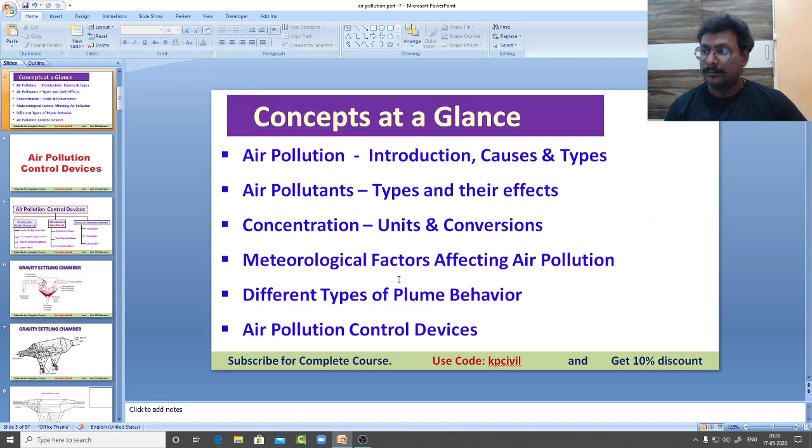Since the last 6 days we are in continuous live sessions on YouTube. This is the last part of air pollution we are going to discuss. I hope you enjoyed all the 6 parts we have discussed previously. From Monday to Saturday, 6 parts of air pollution we have come across. Now, we are going to have the last session of air pollution.

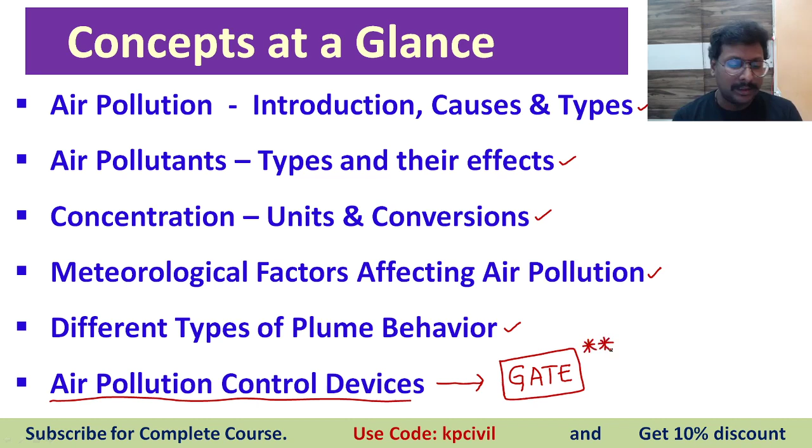Now, air pollution control devices. This is the basic classification. There are 3 categories. First one, solid particle removal. The solid particles available in the air we call TSP, total suspended particulate matter, or SPM, suspended particulate matter. For suspended particulate matter removal, we have gravity settling chamber, centrifugal settling chamber, electrostatic precipitator, and finally fabric filters.

And for the same, we have wet devices, scrubbers, separation of solid particles using some moisture content, water content or liquid chemicals. Devices for the same solid particulate matter in presence of water or liquid chemical we call scrubbers. Scrubbers are cyclonic scrubbers, tray type scrubbers, Venturi scrubbers.

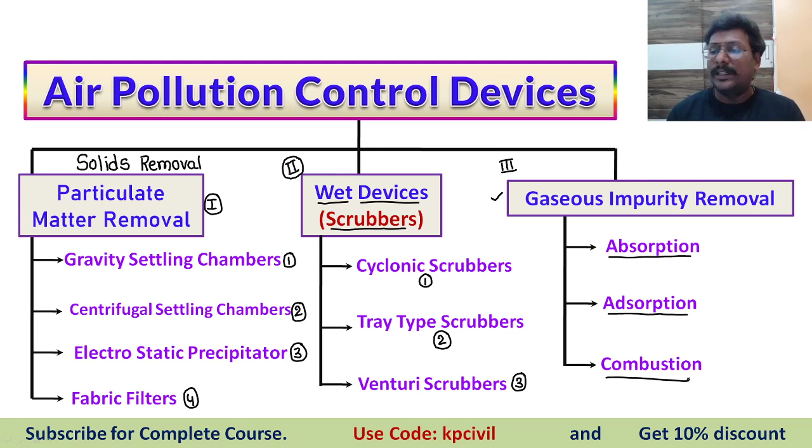Gaseous impurity removal: absorption, adsorption, combustion. Three phenomena. First, solid particulate matter removal in dry manner: gravity settling, centrifugal settling, electrostatic precipitation, fabric filter. The same solid particles in presence of liquid chemical or water: wet devices. Finally, gaseous impurity removal: absorption, adsorption and combustion. First one, the name itself provides the information. Gravity settling chamber means settling of particles.

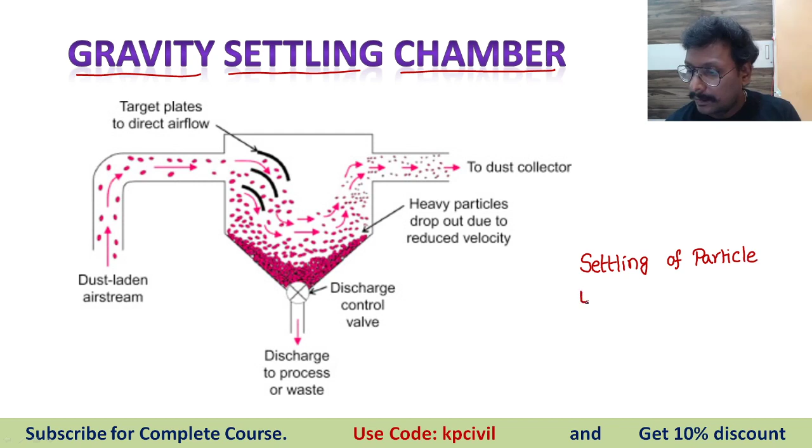Settling of particle under the influence of no artificial force, no physical mechanical force, only depending upon natural gravitational force. So if a particle is to be settled down under the influence of gravitational force, what are the parameters to be considered? Based on mass, self weight of the particle and its density, because the density of particle is greater than density of air.

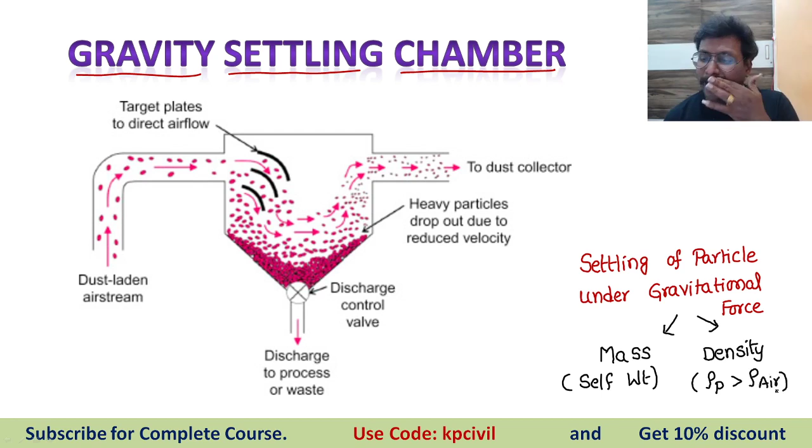So considering these two parameters, the particle whose mass is attracted by gravitational force and the particle whose density is greater than air density, that particle is going to settle down. So it is similar to what we discussed under sedimentation topic in water treatment, same manner. And this is designed to separate out particles with diameter greater than 50 microns.

Gravity settling chamber is provided to separate out particles with diameter greater than 50 microns, but efficiency is only just 50%. Why? Because settling is carried out only under the influence of gravity, particles' self weight and density, not modifying the particle, no additional other forces are provided, only the particle's original mass and density under the influence of gravity.

See here, this is a dust laden air stream, means impure air given into the chamber. Now that impure air is traveling inlet to outlet. During the journey from inlet to outlet, the particles having the mass have settled in a dust hopper. This dust hopper is going to collect the particles. Particles are settled based on their mass and density. Clearly written, heavy particles drop out due to reduced velocity, and heavy particles are given to the dust collector.

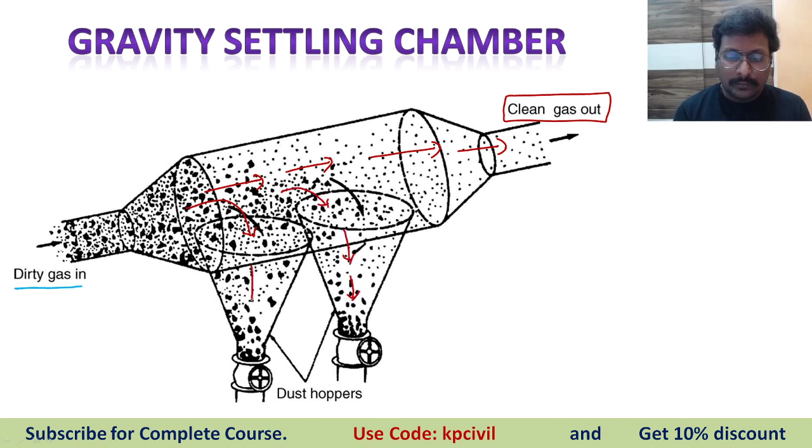This is one more figure. Dirty gas entered into it. Dust hoppers are collecting impurity. Impurities are collected while the air is traveling from inlet to outlet. Clean gas is going out. Impure particles are collected, falling down, and settled in the dust hopper. So this is a clear picture for you, that is easy for you to understand.

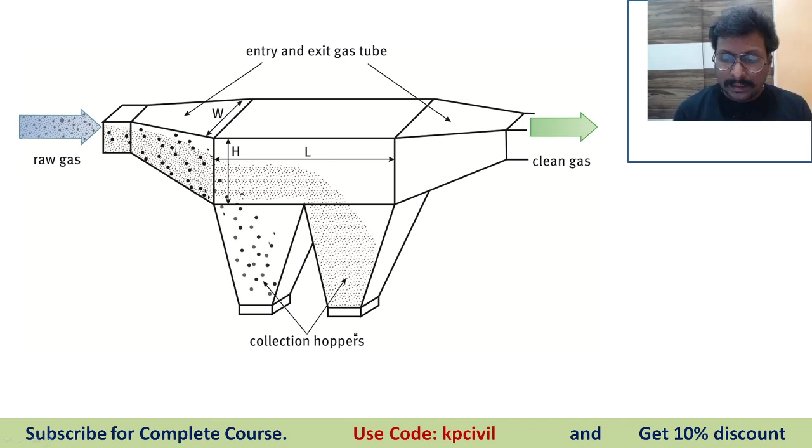There are two collection hoppers at the bottom. At the inlet, raw gas, polluted air. So these large diameter particles entered into the cross section of the chamber. Clean gas is traveling, going out, clean gas exits out.

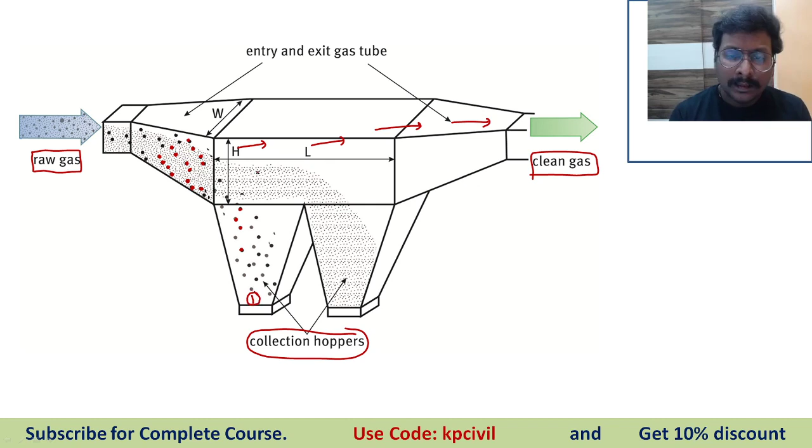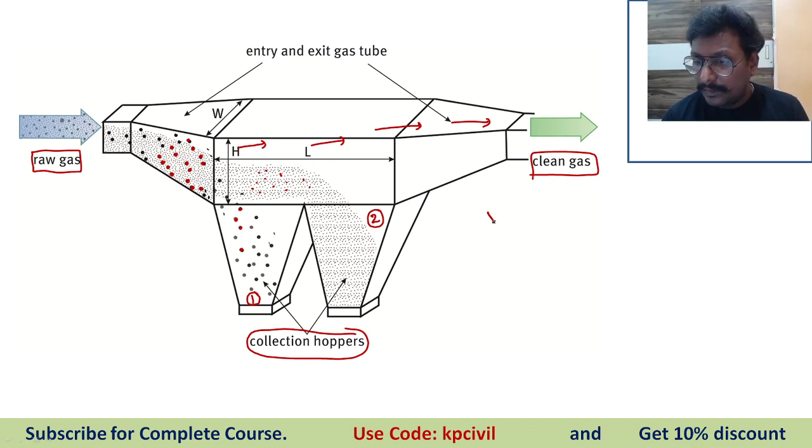During the journey, all the large diameter particles are in dust hopper 1; these are coarse particles, and the fine particles are collected in the second hopper. So in the initial hopper 1, the largest diameter particles are collected. While it is flowing slowly, the smallest particles are also falling down. Here we need to estimate Vs, settling velocity of the air particle. The air particle is going to settle down.

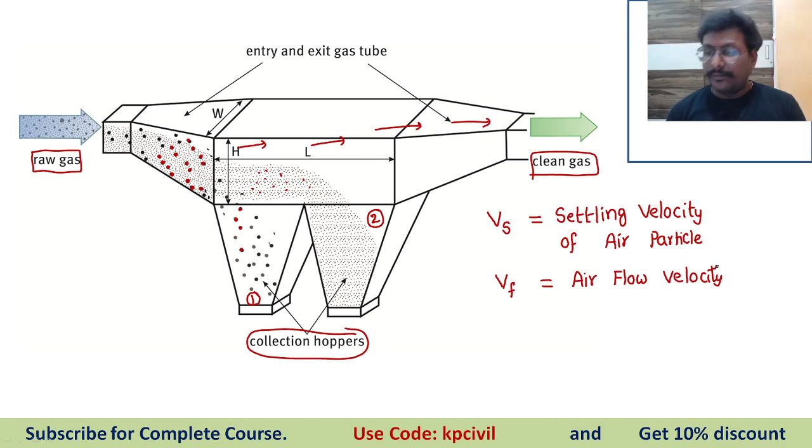And also we have Vf. Vf is air flow velocity. Vs is settling velocity of air particle. You can write down settling velocity. We have the settling velocity formula: g d square by 18 mu into rho p minus rho a, or we can express the same as g d square by 18 nu into S minus 1. Same like sedimentation process in water.

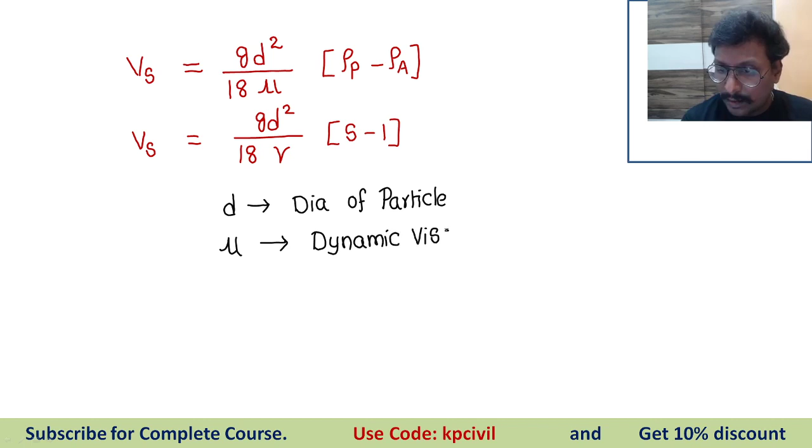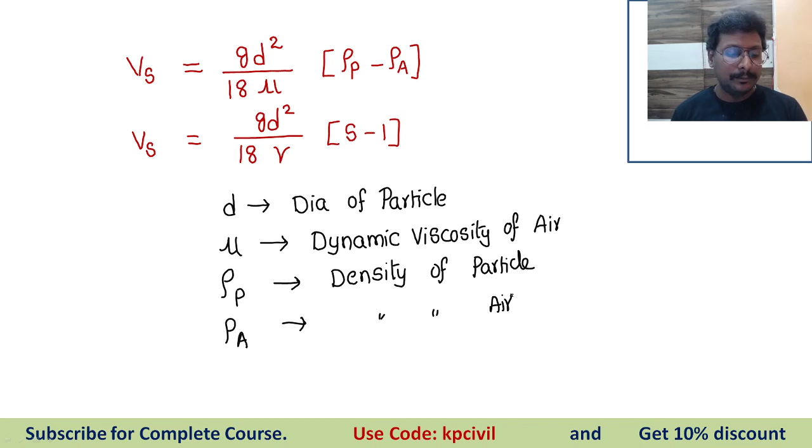d, diameter of particle, diameter of impure particle. Mu, dynamic viscosity of air. Rho p, what is rho p? Density of particle. Rho a, density of air. Density of particle and density of air. Got it?

We'll have a relation here: the time taken by particle to settle down. Distance traveled, depth of chamber, by velocity. What is the general formula for time? Distance by velocity of travel. The particle is traveling the vertical distance of the chamber depth with the settling velocity.

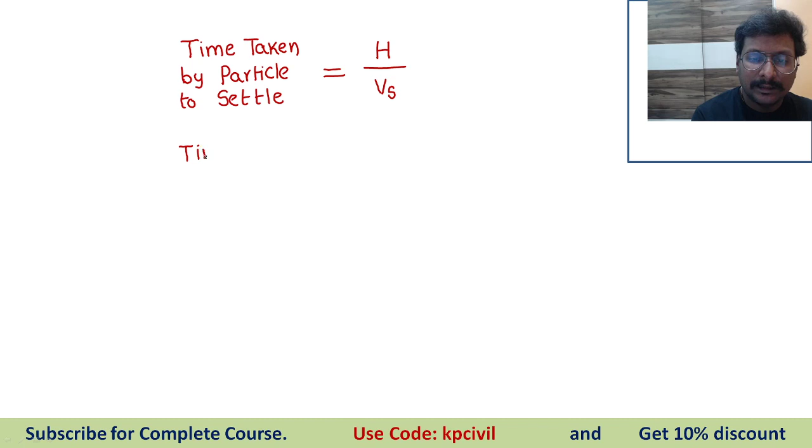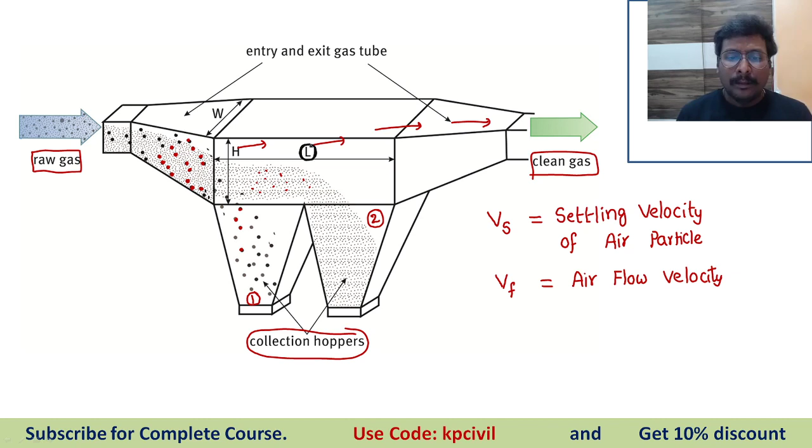Then time taken by air. From where to where is the air traveling? Air is traveling from inlet to outlet. The distance between inlet and outlet is the length of the chamber, and air is traveling with air flow velocity Vf. For particle distance travel, we will consider the depth of the chamber. So length is the distance travelled by air, travelling with velocity Vf.

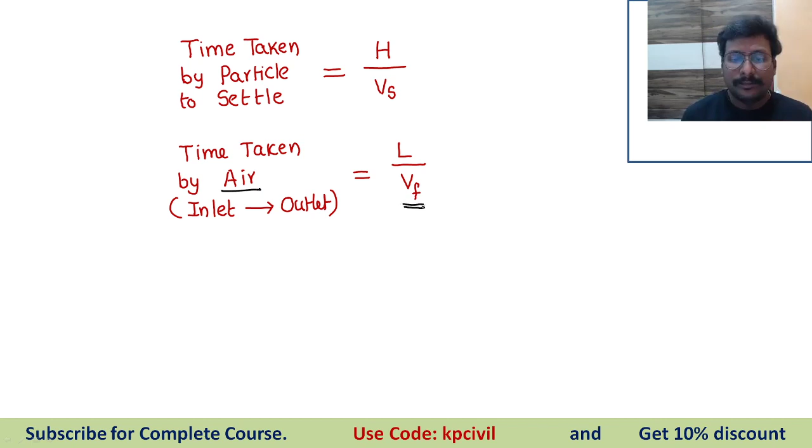The condition required for settling. What is required for settling? Both times must be same. That means H by Vs is equal to L by Vf. Both the times.

In the industries, Naveen, we are not going to install in the atmosphere. We are going to install these instruments or equipments in the industries. So from this we have formula for air flow velocity: Vf is equal to L into Vs by H. So we have the formula for air flow velocity.

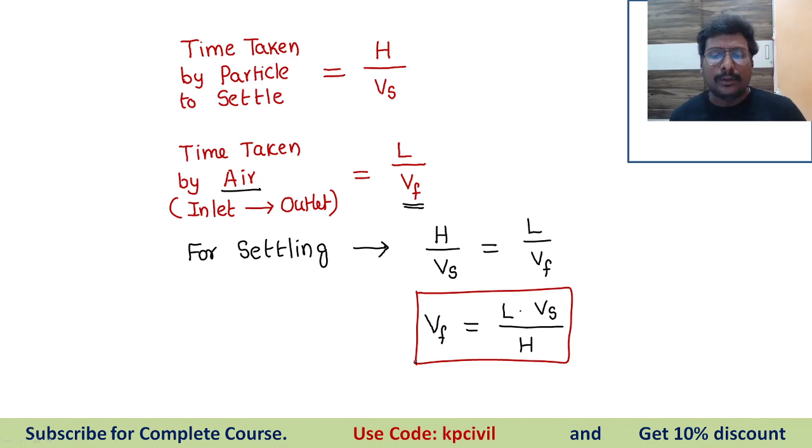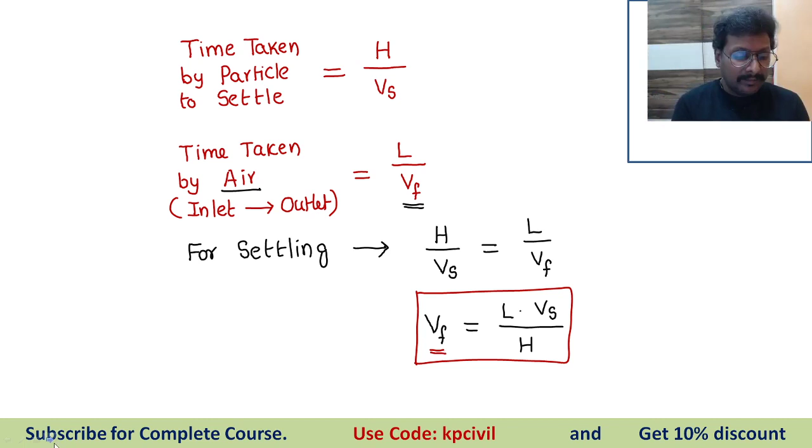Because to settle down the particle, the time taken by particle to settle down is equal to time taken by air to travel. H by Vs is equal to L by Vf. Vs already we have derived using these formulas. So Vf is equal to L into Vs by H. This is related to gravity settling chamber. Okay, we'll go ahead.

Second one, centrifugal settling chamber, which is also called cyclonic separator. This is designed to separate particles of diameter greater than 25 microns and is achieving efficiency 50 to 90%. To separate out particles of diameter 25 micron and to achieve an efficiency 50 to 90%, we are providing centrifugal settling chamber.

What is the difference? Difference is in gravity settling chamber only gravitational force. But here we have additional. What is additional? Centrifugal force. Additionally, we have centrifugal force here. Now, this is the inlet which is allowing the air to enter into it. Air is entered through the inlet, passing through it. Because of centrifugal forces, air is rotating continuously. So air is rotating. This is the plan view.

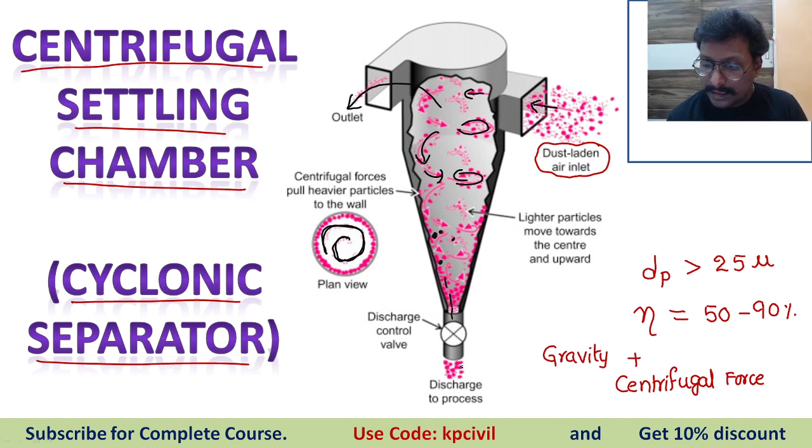This is completely depending upon Bernoulli's principle and Venturi effect. You can write down Bernoulli's principle and Venturi effect. So this is chamber 1. And through a narrow passage, air will travel from chamber 1 to chamber 2. During this journey, while air is passing from A to B, area decreases.

What will the decreased area do? Increases velocity, because rise in velocity happened because discharge is constant. Air flow rate we are not modifying, same air flow rate is passing. Diameter changes at this junction. Due to decrease in diameter, area decreases. So discharge is constant, Q is constant. So velocity rises. What will the rise in velocity do? Rise in velocity will drop the pressure.

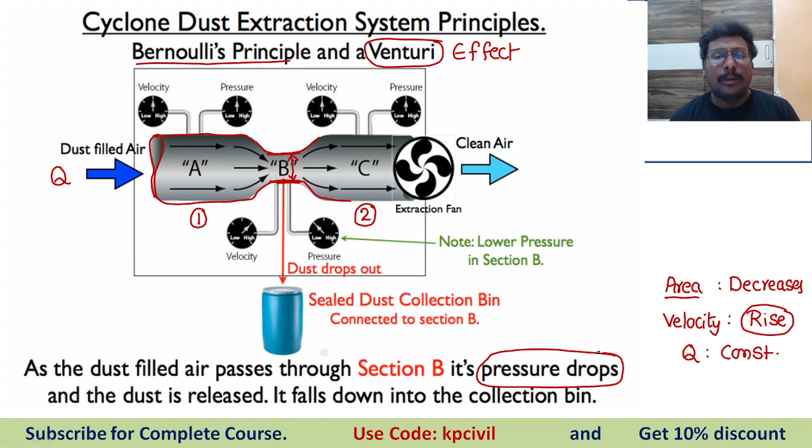So due to sudden pressure drop, what happened? Due to sudden pressure drop, particles will fall down. The particles are traveling with a certain high pressure, suddenly velocity rises, pressure falls down. So particles are collected in the bin because particles are falling down. Again when it reaches this C, again velocity and pressure are normal. Clean air blown through the extraction fan is going out.

So this is the section of lower pressure, see here, clearly mentioned here, velocity is high here, pressure is falling down towards low. Here velocity moderate, pressure moderate. This is condition at A and this is condition at C. In both conditions, velocity and pressure are exactly in the moderate condition.

See here, velocity and pressure. But this is at B. What happened to velocity? Velocity high, increases. What happened to pressure? Pressure low, decreases. This low pressure in the section is noted. Sudden pressure drop will make the particles fall down.

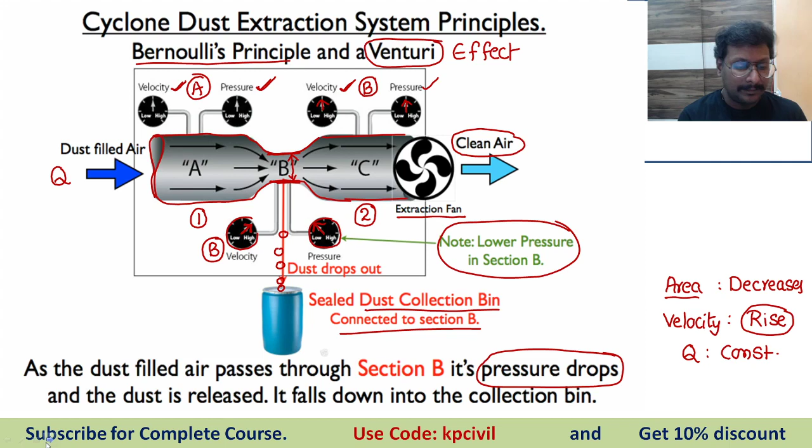Now cyclone dust extraction system, same cyclonic settling chamber we call cyclone dust extraction system. So one more diagram just for your more clarity. Dirty air is entered through inlet. Cleaner air will exit out through upper extraction fan. During this journey, the air is circulating. Dust particles are falling down into sealed dust collection. Through the conical section, cyclones are rotating.

Cyclone is a continuously rotating air that pushes fresh air in upward direction. Fresh air, impurities are less, mass is less, so it goes in upward direction. Impure air, particles are there, mass is there, pressure fall occurs, so it is falling down. So just remember, fresh pure air, we call cleaner air, goes in upward direction.

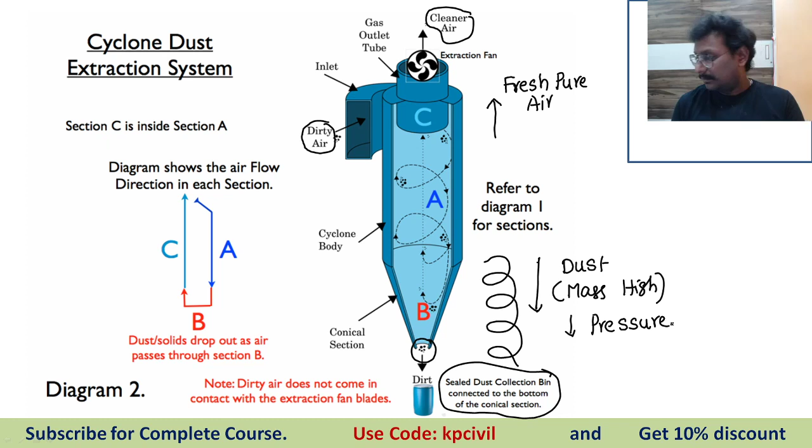Dust, because the dust consists of high mass, is falling down due to sudden drop in the pressure. The dust particles are falling down due to sudden drop in the pressure. Okay. This is one more diagram, mostly not required for you. Then electrostatic precipitator, the third one.

Electrostatic precipitator, we can write it down as ESP. This is provided to separate out particles of diameter greater than or equal to 1 micron. And it can achieve an efficiency between 90 to 99%.

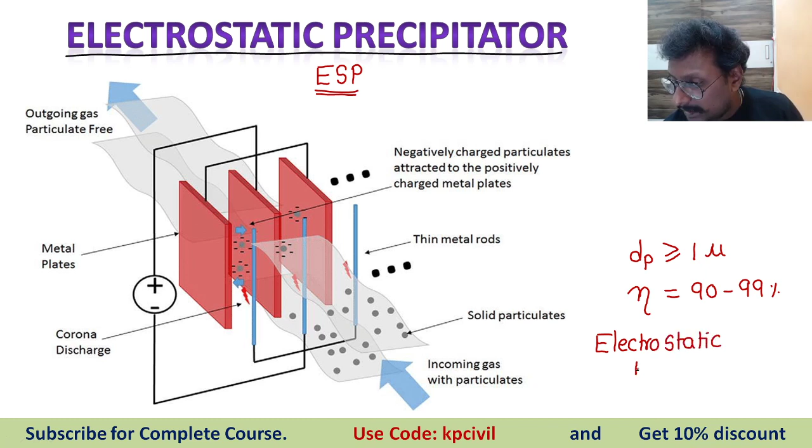What is going on here? The basic principle in electrostatic precipitation is providing electrostatic forces of attraction. What are electrostatic forces of attraction? Simply, we call electrostatic force of attraction positive, negative forces. The positively charged ion or negatively charged ion is attracted by an oppositely charged ion.

Then will the air consist of charged particles? No, no. And especially we have given a very minute diameter, greater than or equal to 1 micron. In such a case, how does the charge come across? So initially, what the electrostatic precipitator will do is impart negative charge to the particles. See here, these are the solid particles going into it, and this is a negative electrode.

This is a wire frame of negative charge. So the negative electrode is connected to this wire frame, clearly see the diagram. All these are negative electrode wire frames. Where have we placed it? The wire frame of negative electrode is placed at the inlet. So incoming gas with solid particulate matter starts entry, and near to the inlet we are providing the wire frame negative electrode.

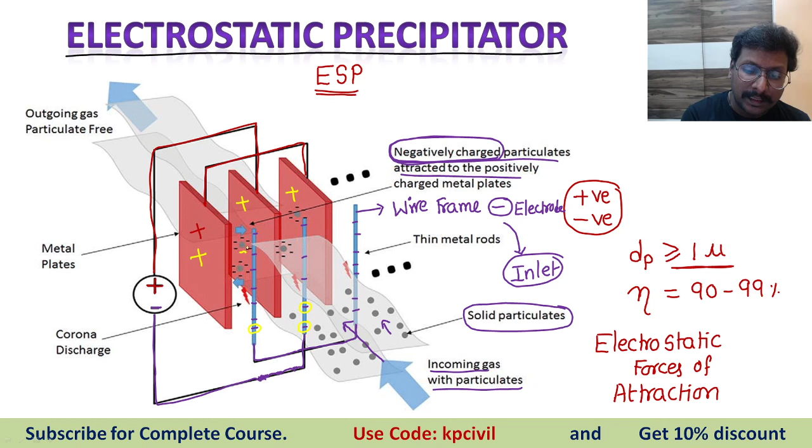This is what we call the electrostatic plate. What is the charge of the electrostatic plate? Positive charge. So air particles entered into the chamber, the electrostatic precipitator. It first interacted with a wire frame carrying negative charge. As it passes through the wire frame, particulate matter is converted into negative charge, so immediately it is attracted onto the positive surface. So the outgoing gas is a particulate free gas.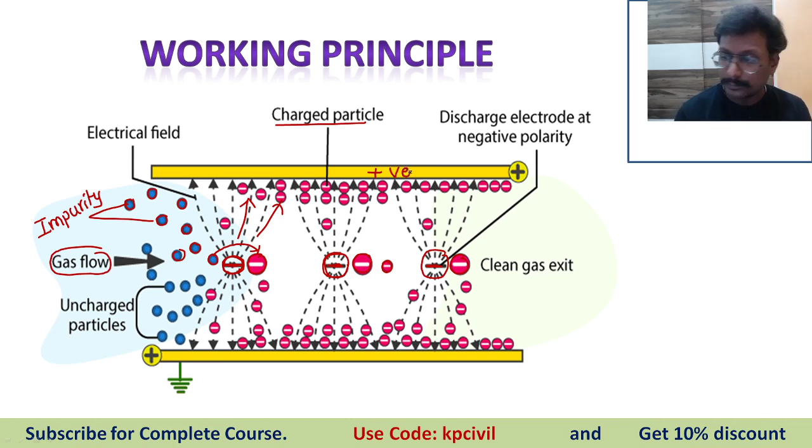I am writing for your clarity. Particles are initially blue color, the impure particles. Then they passed through the negative electrode and were transformed into pink color, negatively charged particles. Then these negatively charged particles are attracted by this positive electrode. So particulate matter first gains the charge from the negative electrode, then is immediately attracted by the positive electrode. Clean gas travels outward.

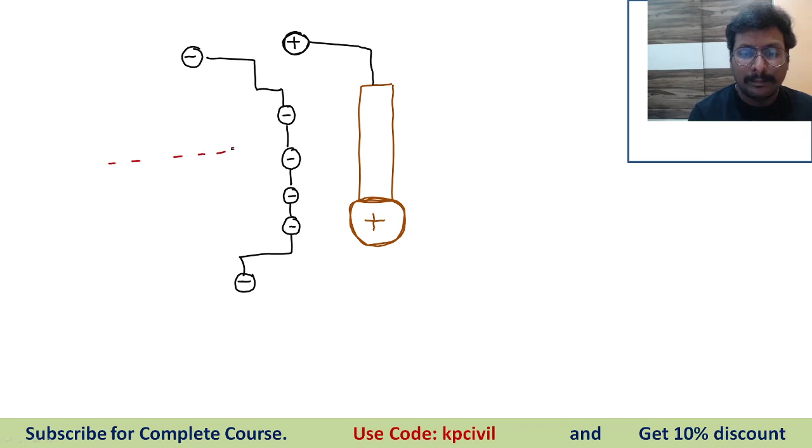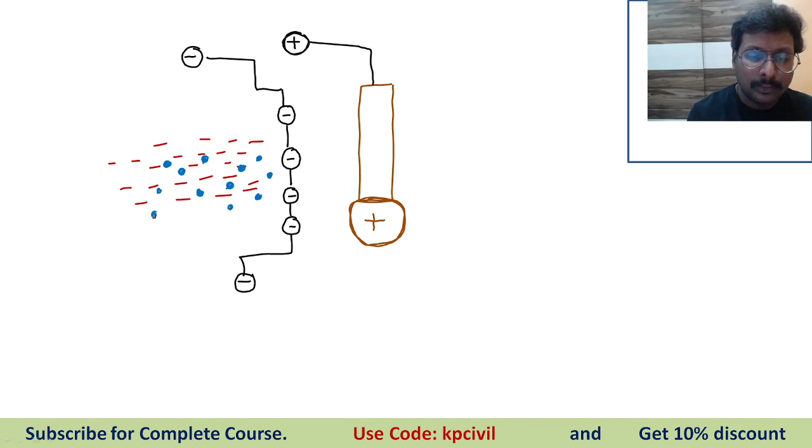I will draw a simple picture for you. This is the electrostatic plate of positive electrode; both surfaces are positive electrodes. And here there is a wire frame of negative mesh connected to the negative electrode. Now, these are air particles, and these are impurities, particulate matter in the air: dust, flue gas, carrying impurities.

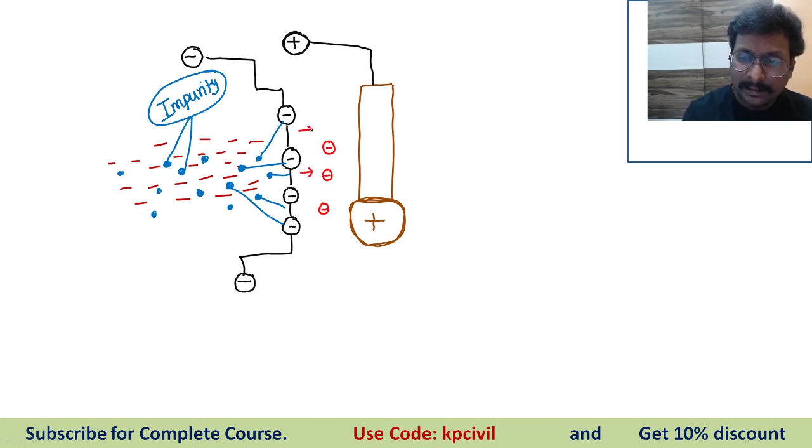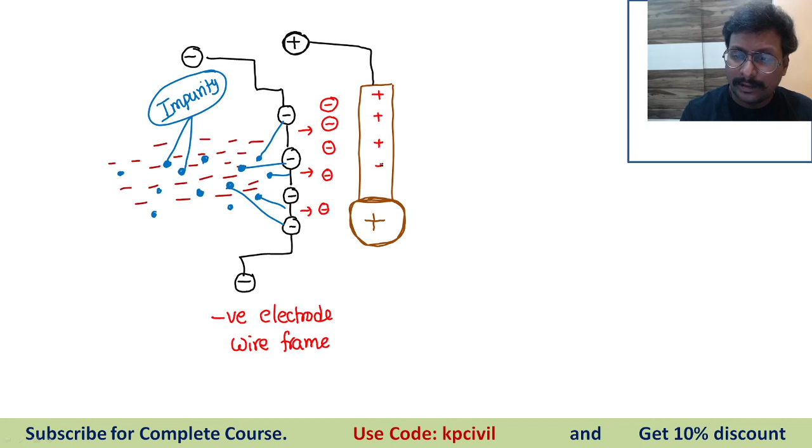Now the impurities will interact with this negative charge. All impure particles are converted into negatively charged particles when they exit out of the negative electrode wire frame. And this is the positive electrode throughout the length. So immediately all these particles are attached onto the positive electrode. What is remaining? Clean and fresh air. Clean air goes outside. Got it?

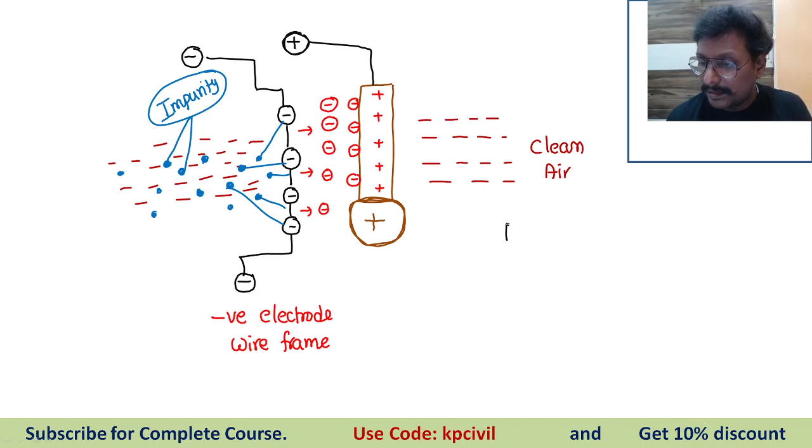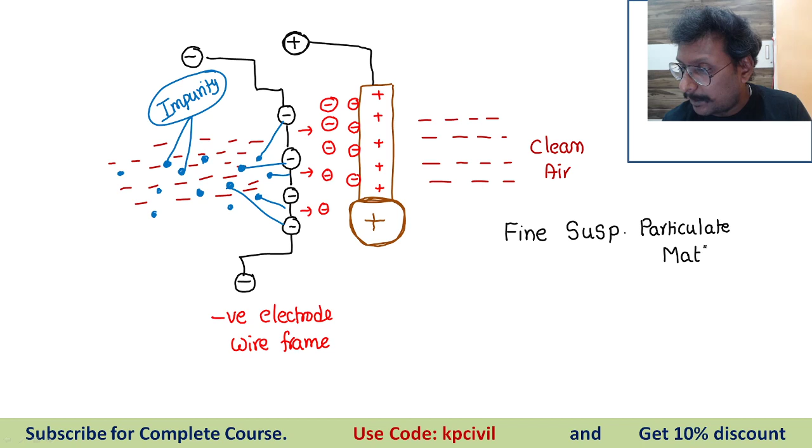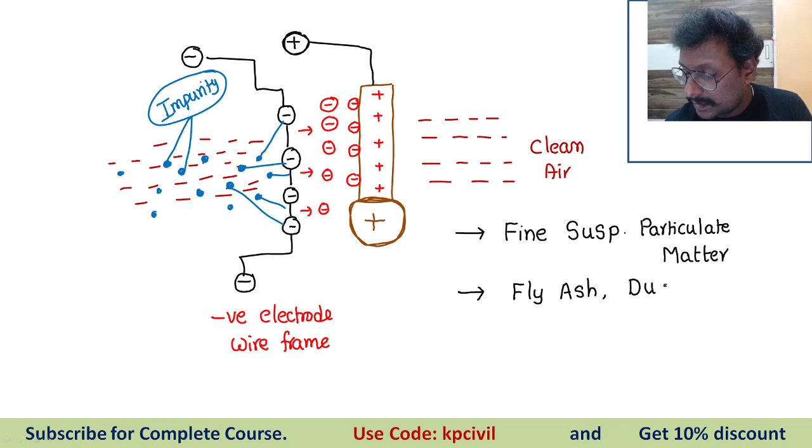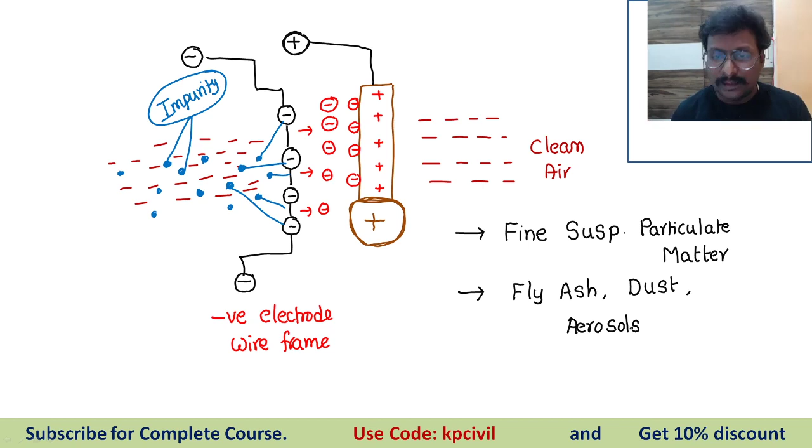Got it? Now, for what particles is this electrostatic precipitation given? For fine suspended particulate matter. Fine suspended particulate matter, especially fly ash particles, dust particles, and including some aerosols, small amount of aerosols also. For that we are providing electrostatic precipitation.

Efficiency of electrostatic precipitation: Deutsch-Anderson equation. Efficiency is equal to 1 minus e power minus WA by Q. W is the terminal drift velocity, final velocity of air particles, meter per second. Efficiency is nothing but fractional collection efficiency, we know it. A is the total collection area; simply remember this as electrostatic plate area. And Q is discharge, meter cube per second.

So velocity into area by discharge we are considering. Instead of all this information I am going to give you one simple formula. Efficiency is equal to 1 minus e power minus WA by Q into 100, efficiency in percentage. We consider air flow rate after ESP inlet is designed. Inlet is already designed means discharge is constant, diameter is constant, area of electrostatic precipitator is constant, velocity also constant.

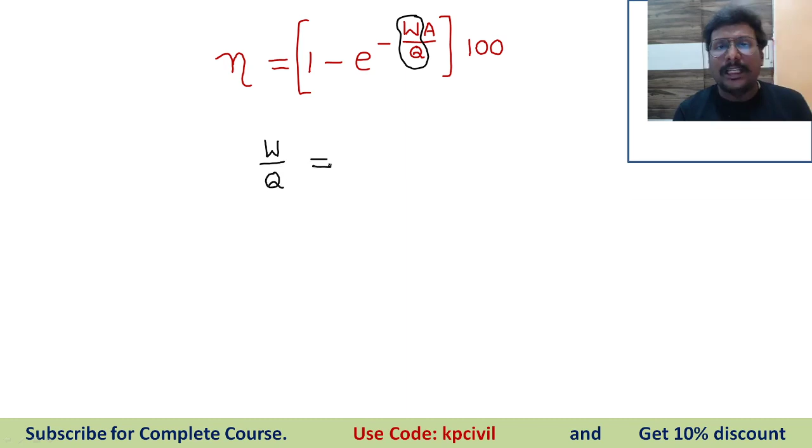So I will take W by Q. Once electrostatic precipitator construction is completed, W by Q is said to be a constant, which we represent as K. So now how can we write down the formula? Simple. Efficiency is equal to 1 minus e power minus KA into 100 for electrostatic precipitator efficiency. Clear? Shall we move on?

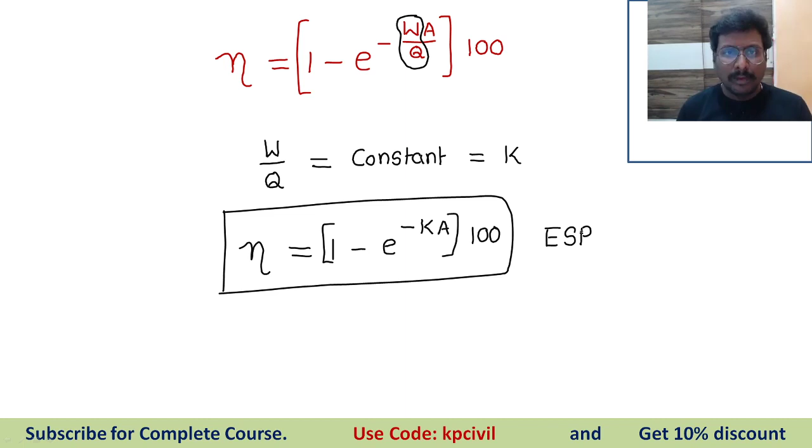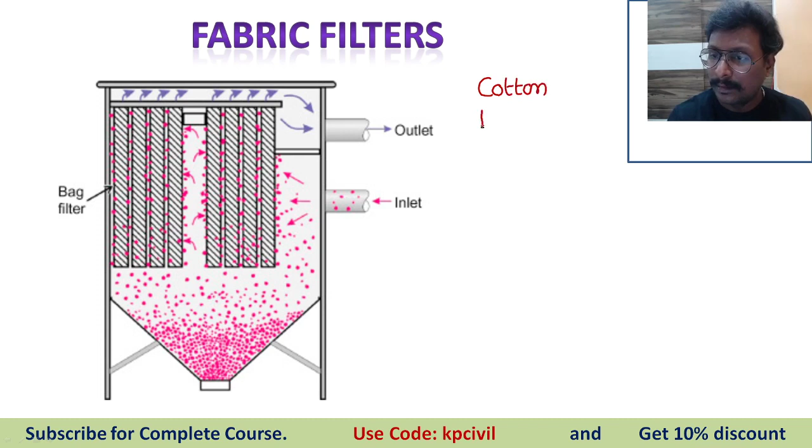Fabric filters. These are also called cotton baghouse filters. Fabric filters and cotton baghouse filters, both are same. Designed to separate particles of diameter less than or equal to 1 micron. Efficiency greater than or equal to 99%, highest efficiency.

So air is passed through the inlet. Air travels through the filter bags. These are the filter bags: chamber 1, chamber 2, chamber 3, chamber 4, like that. Air passes. Particles are entrapped, not inside the filter bag, but outside the filter bag. So all particles are falling down outside the filter bag. Purified air passes from each bag and goes out as an outlet. The filter does not allow entry of particles into it. The filter allows passage of air only.

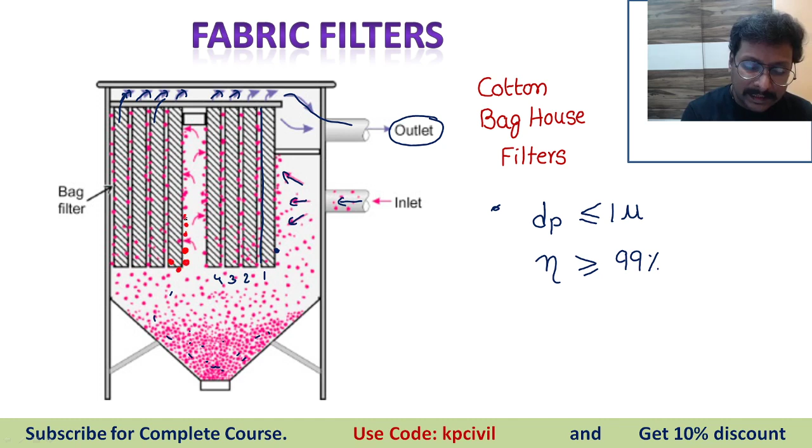Then where are the particles? Particles are attached on the filter, on the surface. See here, particles are attached on the surface. So particles which are attached on the surface slowly fall down and are separated out. I will show you. This is the condition. Impure raw gas with particles. Particles are allowed to enter into the filter chamber. This is the filtration area.

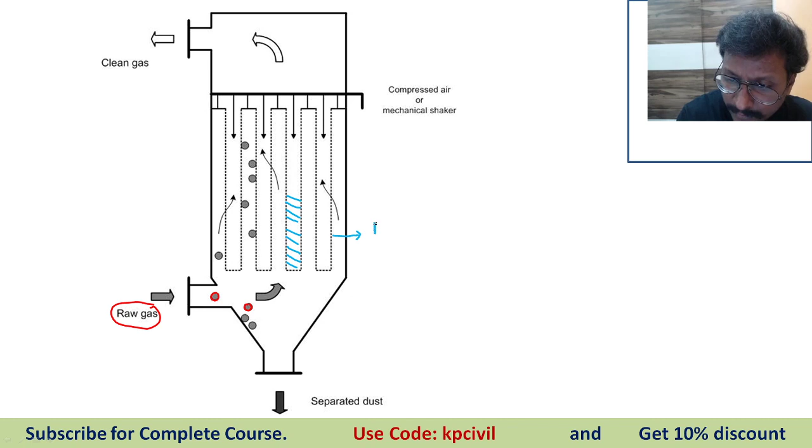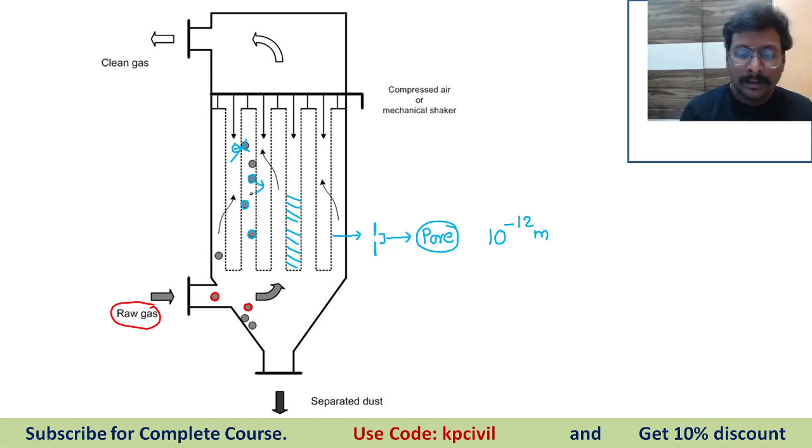Where are the pores? This is the pore. This gap is the pore, a very minute pore. These pores are not allowing particles. Pore diameter is 10 power minus 12 meter, very minute and microscopic pore. Internally air passes. What happened? The particle attaches onto the surface, unable to go inside. So the particles will be falling down later on. Clean air goes out.

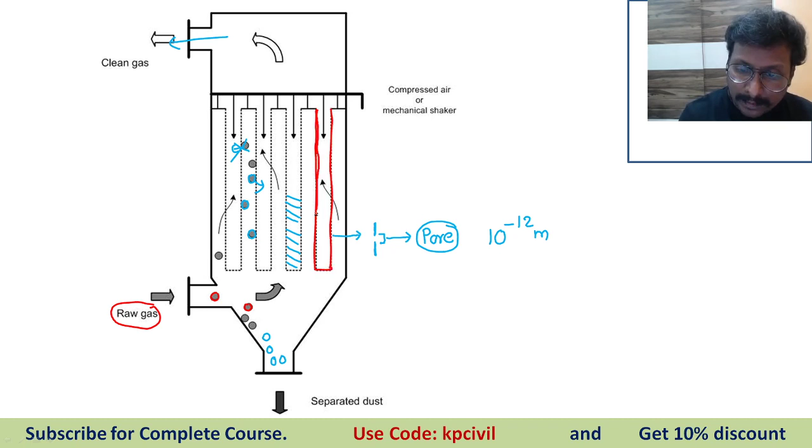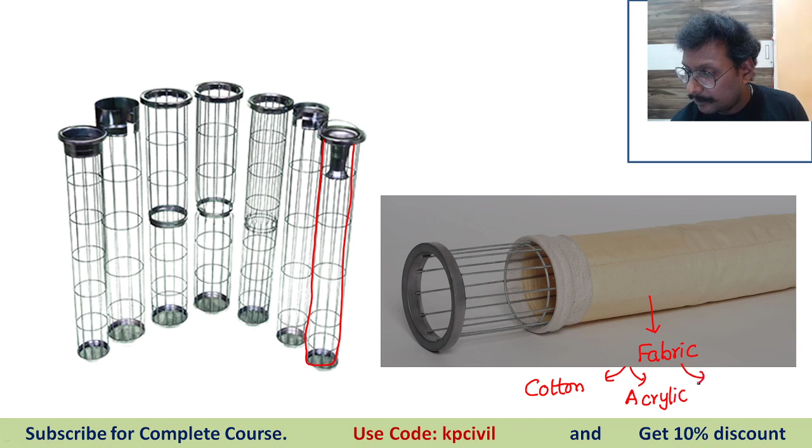How is the filter prepared? I am going to show the picture of this filter. Consider this is one cylindrical filter bag. This is a wire frame network covered with fabric material. The fabric may be cotton, acrylic, or polyester; any of the three is provided. So the grill-like chamber is covered with cloth made of fabric, which is cotton, acrylic or polyester.

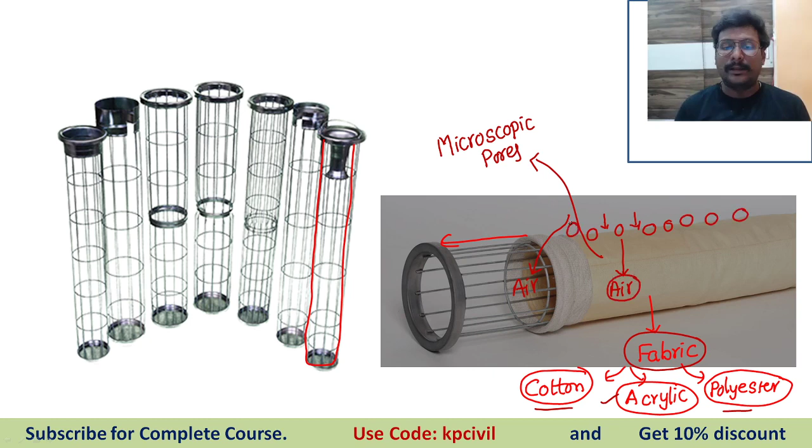Now air and particles are given. Air will go inside. But what happened to the particles? Particles are stopped here. This fabric consists of minute microscopic pores, not even visible to the naked eye. It allows passage of air only. So inside, air is going. Particles are attached on the outside of the fabric. That is called fabric filter, or baghouse filter.

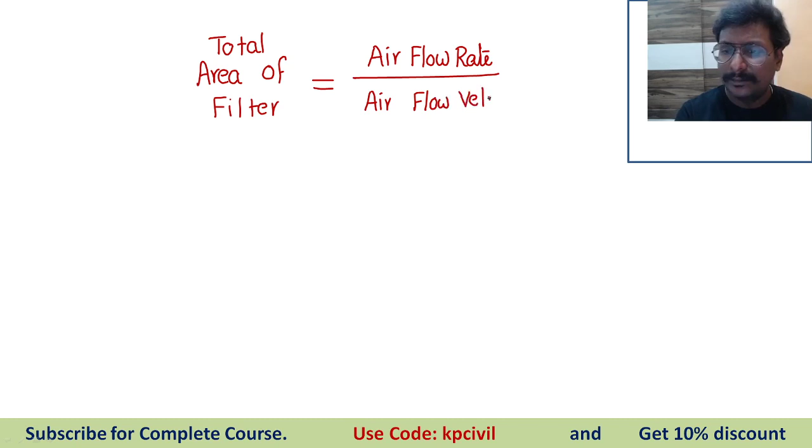Then total area of filter. When we consider total area of filter, we can take it as air flow rate divided by air flow velocity. What is air flow rate? Air flow rate is nothing but discharge. Air flow velocity is nothing but velocity. Q by V.

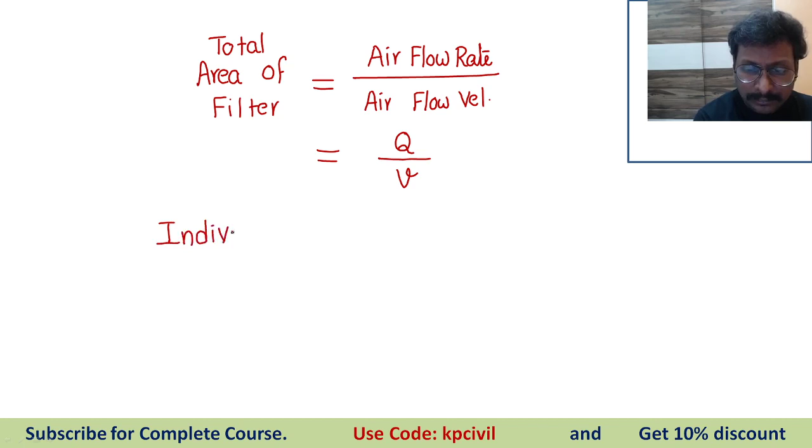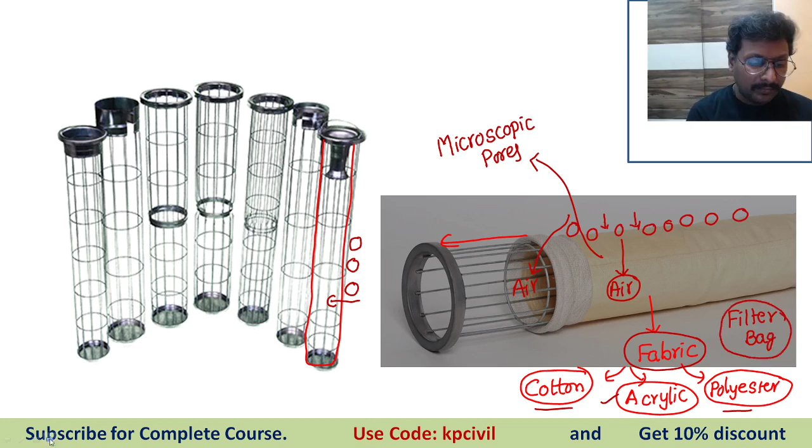But we have individual bags now. Individual surface area of filter bag, each one filter bag. What is that filter bag? This one. This diagram what I have shown now is named as a filter bag. What is the individual area of filter bag? This is a cylindrical filter bag. We will consider pi dl: length of travel of air, diameter of filter bag, pi dl.

Now for one filter, how many bags are required? Number of filter bags required is equal to total area by individual area. What is total area? Discharge by velocity. Individual area, pi dl. So how can we write down? N, the number of filter bags, is equal to discharge by velocity into pi dl. This is the number of filter bags. Got it?

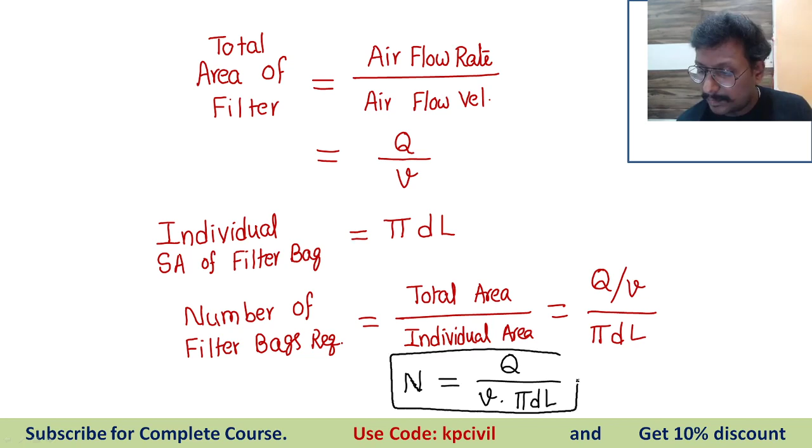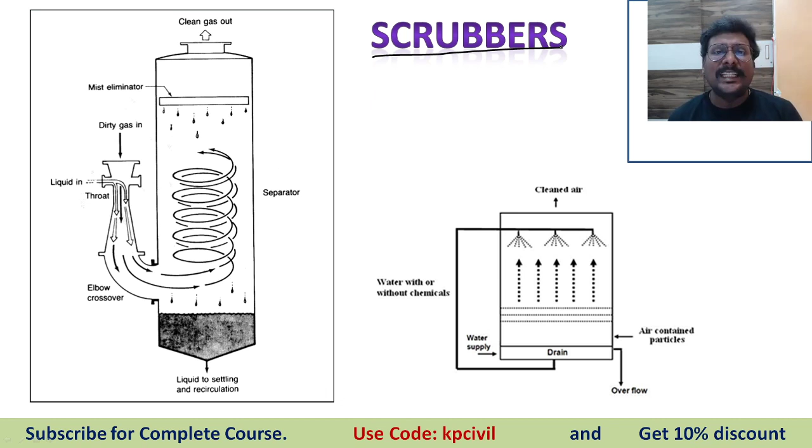Now, scrubbers. I think you know about the scrub. Normally in a kitchen, people clean the utensils by using a scrub. Have you seen it? A scrub is a rough textured surface. Internally it carries a smooth sponge-like material. Can you clean or wash the utensils with the scrub directly without water? Is it possible? Cleaning or washing utensils is impossible without water. So water is required. Same phenomena here.

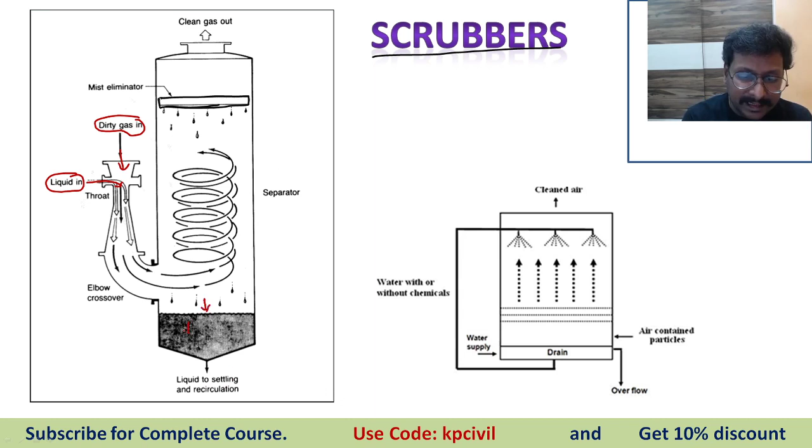Air is going to be cleaned, washed away by passing air through a scrubbing chamber. But that scrubber needs water, liquid. So from the top, mist, water droplets. This is dirty gas in, this is liquid in. Both the liquid and gas mix together and pass through the scrubbing chamber. Then liquid with impure particles settles down. Then clean air goes out because the mist eliminator will take out moisture content. This is one model.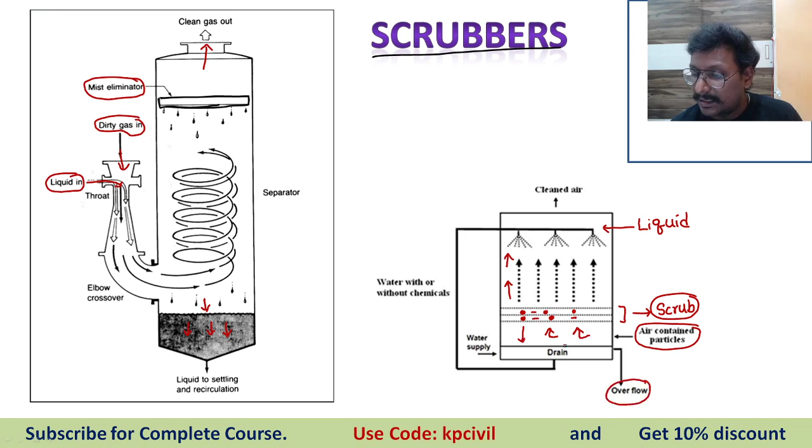This is the second model. This is liquid inlet. Liquid is releasing from top. Scrubbing chamber is present here. Then air containing particles enters, traveling in this path. In the scrubbing chamber, air and water interact with one another. Then clean air will go away. Water with impurities falls down. That overflow will be collected in the drain.

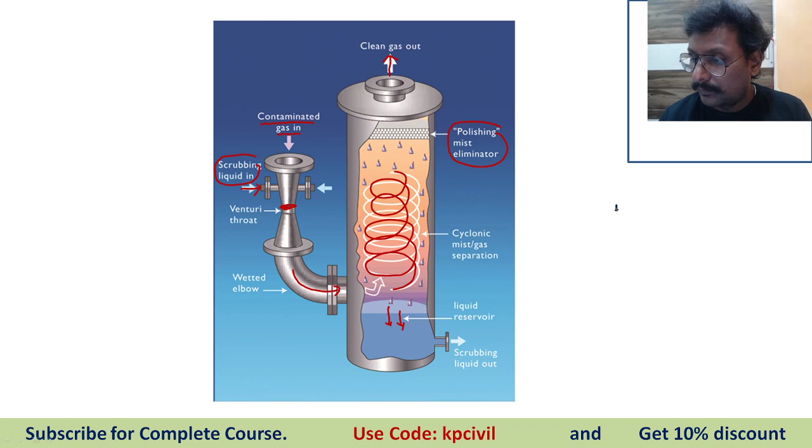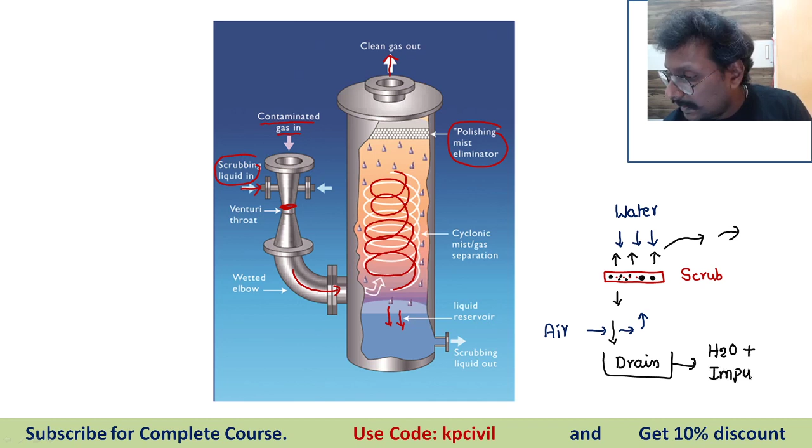I will write down, easy for you. From the top, water is entering, liquid droplets. From the bottom, air is entering, gaseous particles. In the middle of the chamber, this is the scrubbing layer. Impure particles of air are entrapped in the scrubbing chamber. Clean air goes upward and is taken out. Water with impurities falls down into the drain. So air impurities are transferred to water and collected in the drain.

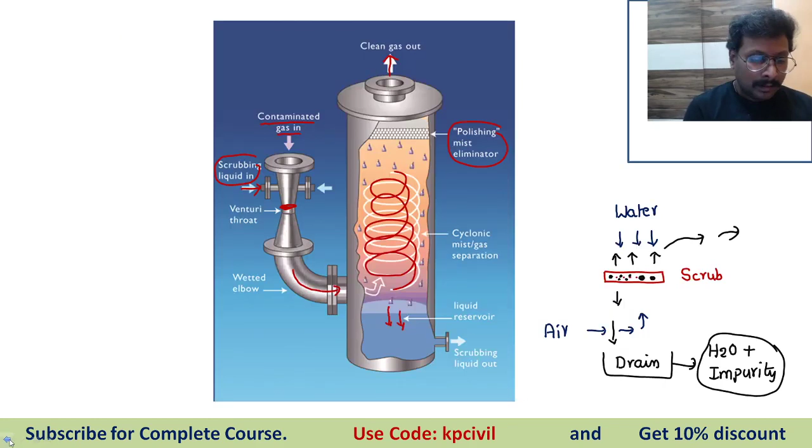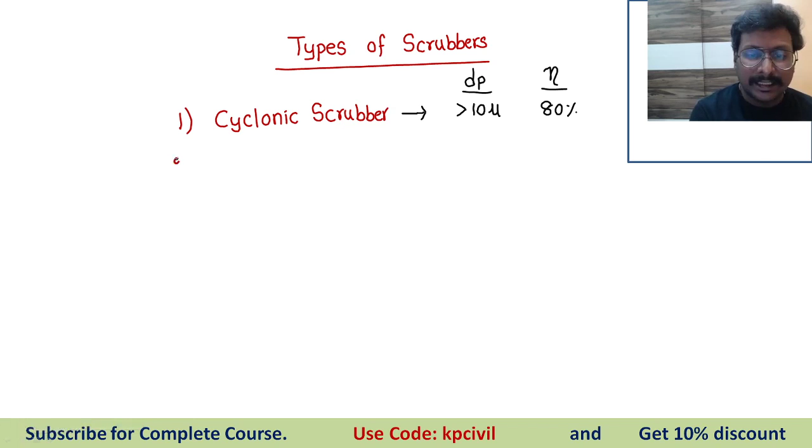These scrubbers we can classify into three types. First one, cyclonic scrubber, provided for separation of particles with a diameter greater than 10 microns, and it can achieve an efficiency of 80%. Second one, tray type scrubber, provided to separate particles of diameter 2.5 micron, achieves an efficiency of 85%.

Last one, the Indian model of scrubbing device. The scrubbers we use in India: Venturi scrubber, for diameter greater than 1 micron, achieves an efficiency of 90%. So if you have any question related to scrubbers, you can answer it as Venturi scrubber. Got it?

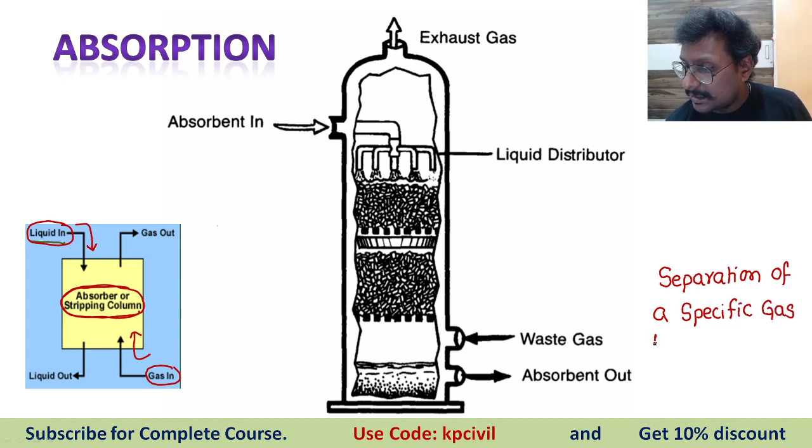So absorption is utilized for separation of a specific gas component, not all gaseous impurities. Specific gas by chemical reaction with liquid absorbent. So we are selecting some specific gas.

For example, you need to separate out carbon dioxide. Then the liquid specific to carbon dioxide is taken as a chemical absorbent. That is loaded. So that liquid chemical absorbent and carbon dioxide react with one another, entrapped. Remaining gases go out. That means we have separated carbon dioxide from that air. Same thing here. Absorbent is in, liquid distributor is taken, liquid is loaded here. Both chemically react here, remaining gases go out.

Remaining gases go out. Here, waste gas is loaded from the bottom. Absorbent is given from the top. Liquid is not given by a single pipe. So this is an inlet pipe. The inlet pipe carries several outlets. See, this is the liquid distribution channel. Liquid is distributed by these several outlets.

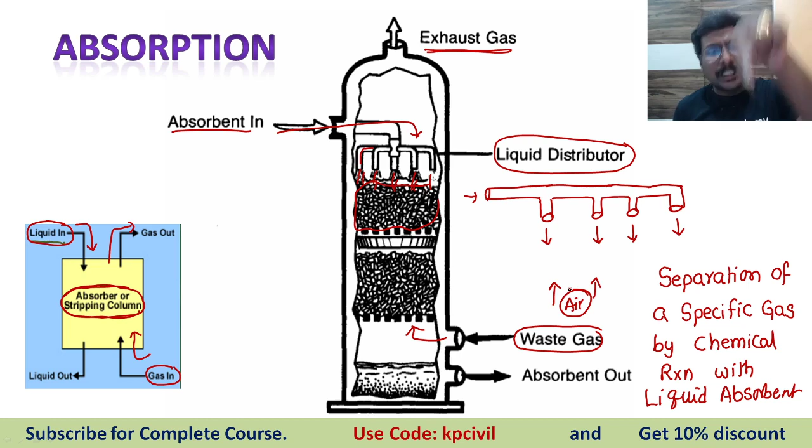Liquid is falling down. From where is air coming? Air particles are going in the upward direction. In the junction they mix. Liquid will absorb only that specific gas and separate it out. Remaining gas will exit out. For separation of a specific gas we are using absorption.

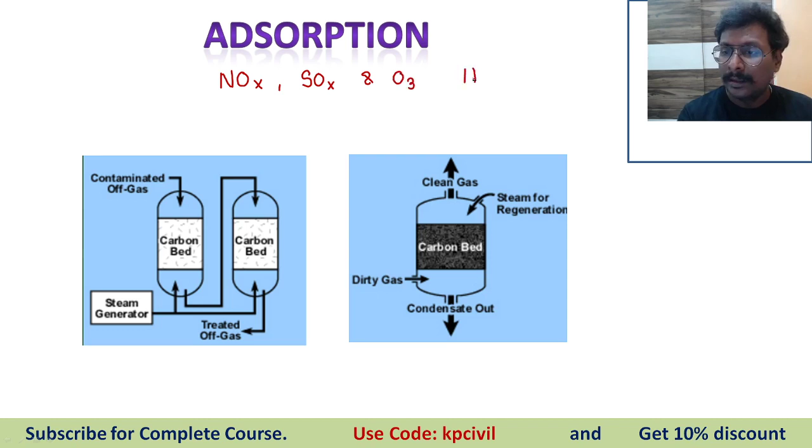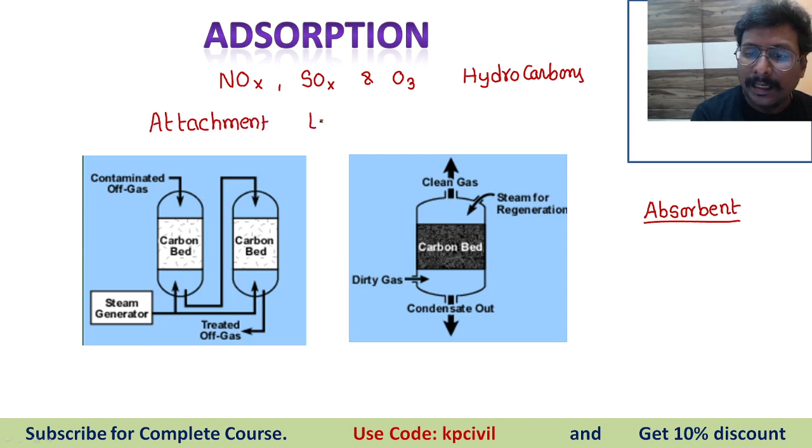Adsorption. Adsorption is provided for separation of NOx, SOx and ozone, including a few hydrocarbons, even volatile organic compounds. Now, adsorbent, this is very important. Adsorbent is a chemical. What is adsorption? Adsorption is the phenomenon of attachment of a particle onto a surface. Whose surface? Adsorbent's surface. Attachment to adsorbent's surface.

As the adsorbent, we may use carbon, maybe activated carbon. We may use silica also as adsorbent. Agar material is also utilized as adsorbent. We can use carbon, silica or agar as adsorbent. Here we are taking carbon, the most used adsorbent, a carbon bed. So contaminated gas is given into this carbon bed. Then the carbon bed attaches to the impure particles, gases. Treated gas is taken out.

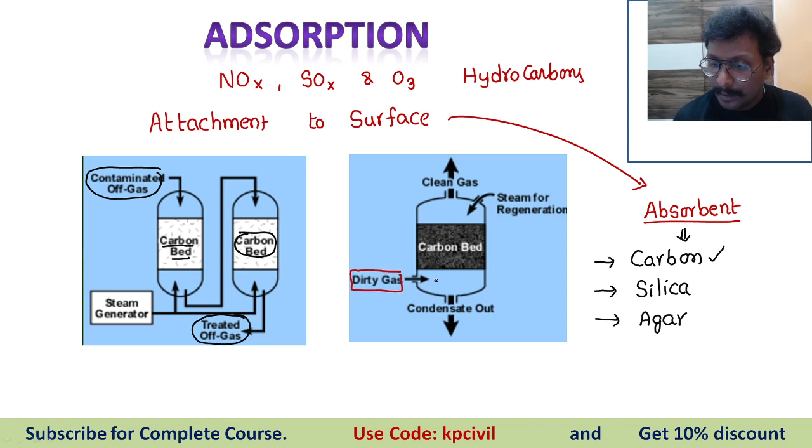Same thing, same diagram. Dirty gas, impure gas passed through the carbon bed. So previously how is the carbon bed? The carbon bed is clear, white, very white. What happened after treatment? All gases are entrapped. It was transformed into a dirty carbon bed, black carbon bed. Pure carbon bed is given, converted into black carbon bed. Clean gas goes out. That is said to be adsorption. This is the mechanism of adsorption.

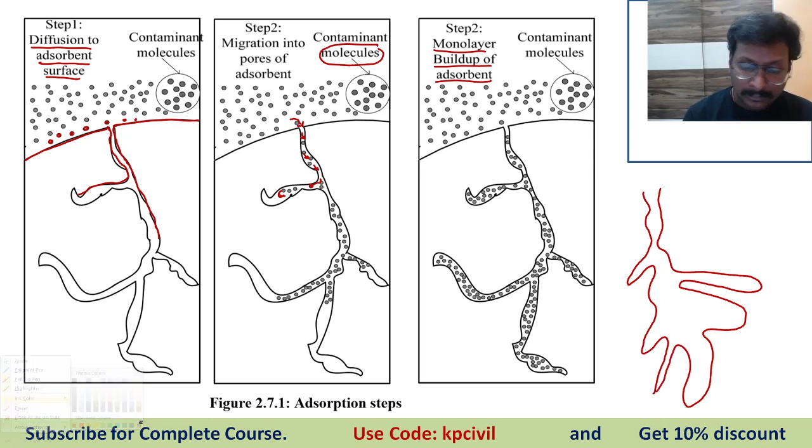What happened? So this is the adsorbent lining we have provided. Then where are the particles attached? Particles are attached here. So I will show. Here at each surface of the adsorbent layer, particles are entrapped, attached. Attachment onto the surface of adsorbent, this phenomenon we call adsorption. So a good adsorbent is very important for adsorption. This is adsorbent only.

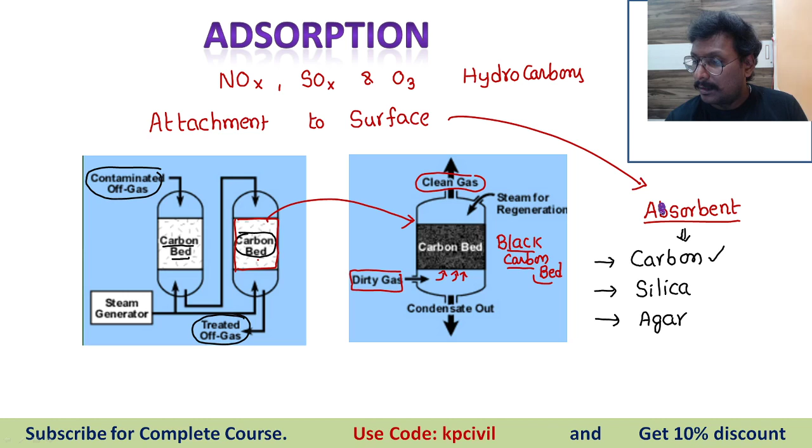Good, Manoj, very good.

So this finishes the total air pollution. First we discussed the types of air pollution, how they occur. Then we discussed the types of air pollutants, their sources, their effects, the damage to humans, plants and animals. And then we came across concentrations and their unit conversion.

After that, a very important topic, meteorological factors: due to temperature, wind velocity, humidity, how the plume released from the industrial chimney will behave. We studied looping plume, coning plume, fanning plume, trapping, neutral, n varieties of plume behaviors. Vertical temperature profile, how temperature changes from ground level to the stack. And finally, the devices to be installed in industries to control air pollutants from being released into the atmosphere. So we have finished the complete topic of air pollution in 7 hours. If you go through this, surely you have one compulsory numerical question in the GATE exam.